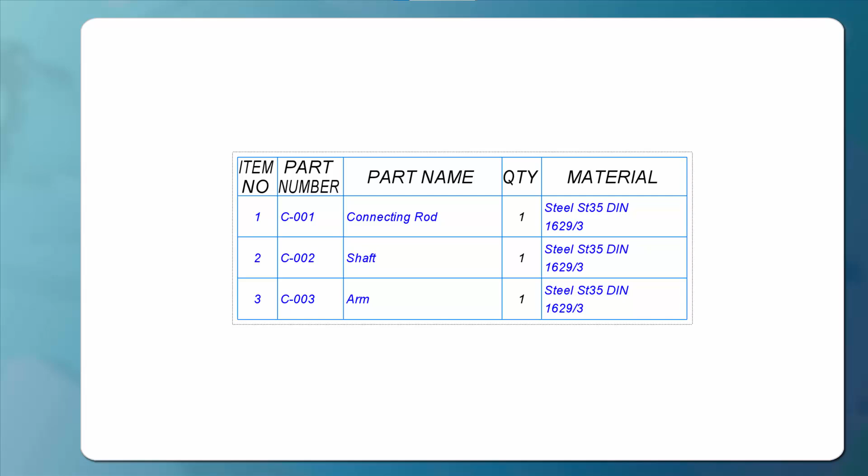In this video, we'll finish creating the report and test how it works. We don't need to number report tables. Turn on the Associative Report option because you are creating the report linked to the assembly. Data in the form of links is enabled because the bill of materials data needs to be linked to assembly parameters. Leave the following settings as default. They only make sense if you create multiple tables.

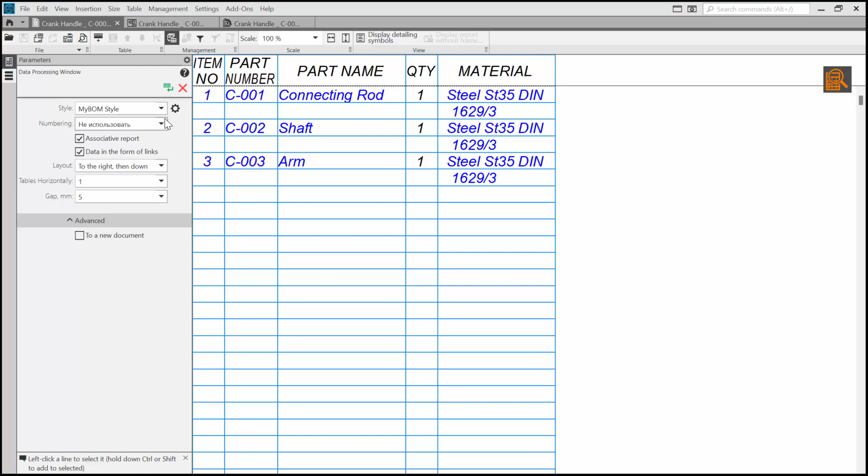The Data Processing Window option allows you to review the table in a special window before placing it in the document. Leave this option turned on. Do not turn on to a new document yet. You will insert the bill of materials into our drawing we've already created. Click Create. The Data Processing window will open. You can edit some settings here, or correct the report style if needed. Let's change the alignment for the material column to the left.

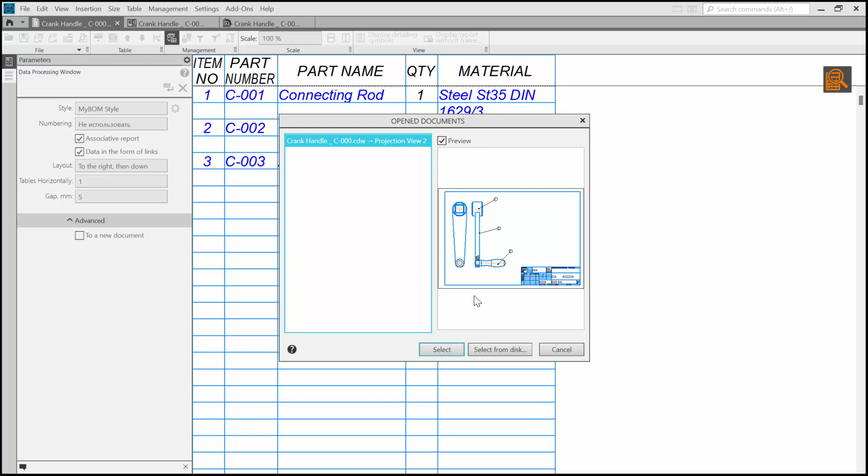Click Create. The Opened Documents dialog appears. The system prompts you to place the bill of materials in one of the open documents. If no documents are open, the system will request that you select a document on your computer. Select the crank handle drawing and click Select. Place the table on the drawing sheet. Finish the command. Go to the drawing. Let's adjust the views and the table a little.

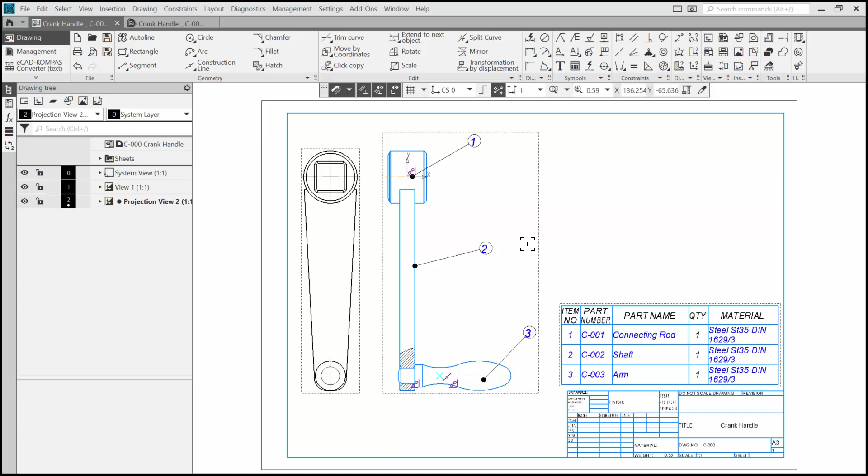Let's check how the connection between the documents works. Go to the Assembly and add one more arm. Place it anywhere, it doesn't matter because we're adding the arm only for the experiment. Save the model and return to the drawing. Rebuild it. You can see that the second arm has appeared in the views and in the table. However, it isn't grouped with the first arm. This happened because the item number for the second arm hadn't been defined.

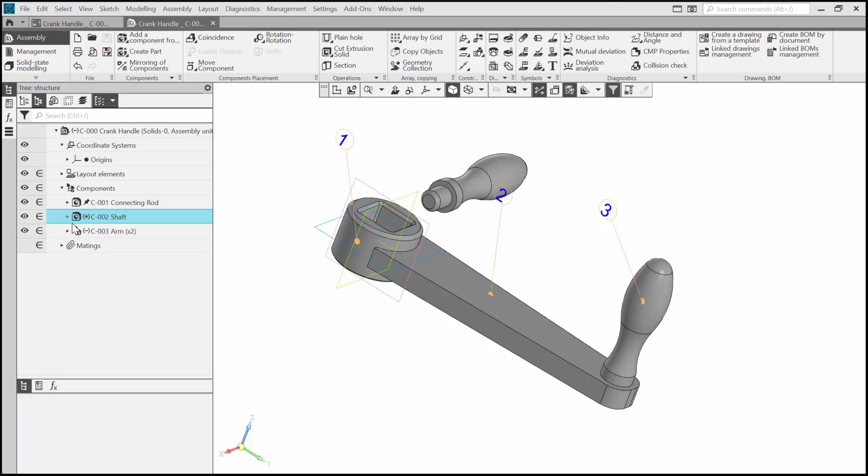Let's fix that. Go back to the model. If we review the new arm's properties, we'll see that the position property field is empty. You can assign the position value right here. However, if you're working with a large assembly containing numerous parts, manually changing properties for each part one by one would be very time-consuming. We will use the Product BOM panel.

First, we need to display it. Go to the Settings menu, Toolbars, Product BOM. The Product BOM table will appear. Later, you can return to this panel using this button. Click Expand. You can see the composition of our assembly here and the properties of all the components. For more detailed information about the Product BOM toolbar, refer to the KOMPAS-3D help system or our upcoming lessons.

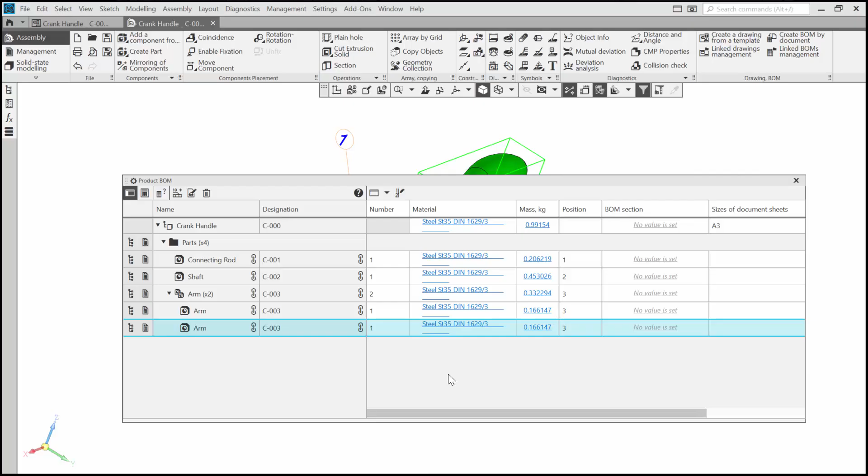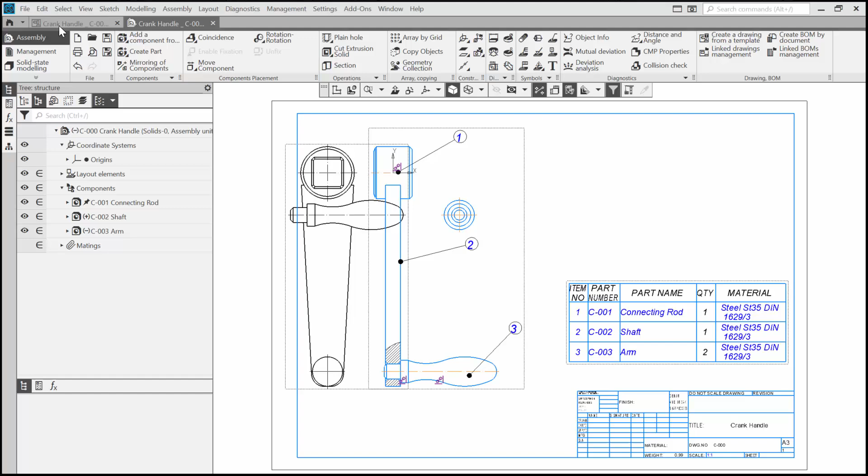Now, start this command. It allows you to assign item numbers to components. The second arm has received its number. Save the assembly. Rebuild the drawing. Now the arms are grouped. Let me delete the redundant arm. The data in the table has been changed automatically. The report data are linked to the assembly parameters.

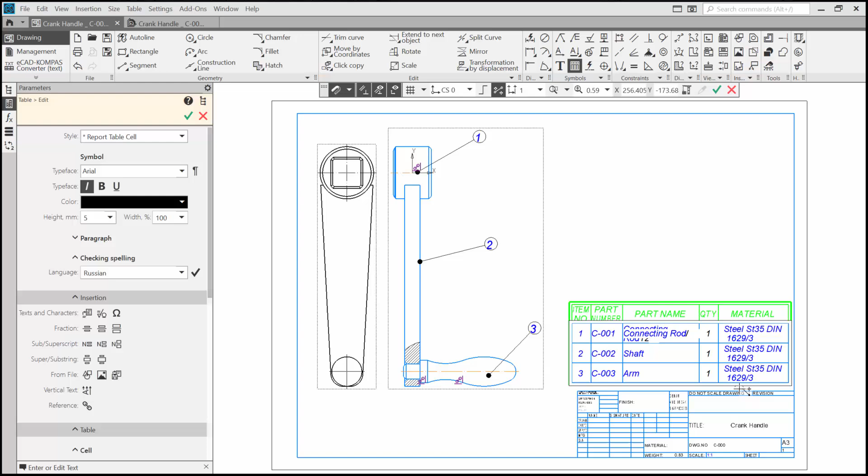If you try to edit them right in the table, the links will break, and the report table will not update when the assembly changes. Note how the text color has changed. Text links in KOMPAS are blue. Once the links are broken, you cannot relink the data. You will have to create the report again. Use Ctrl-Z to undo the last commands. You can add additional text to the report table cells. Parameter links will be preserved. It's recommended to edit the bill of materials last. Double-click on the report's frame if you want to edit the report.

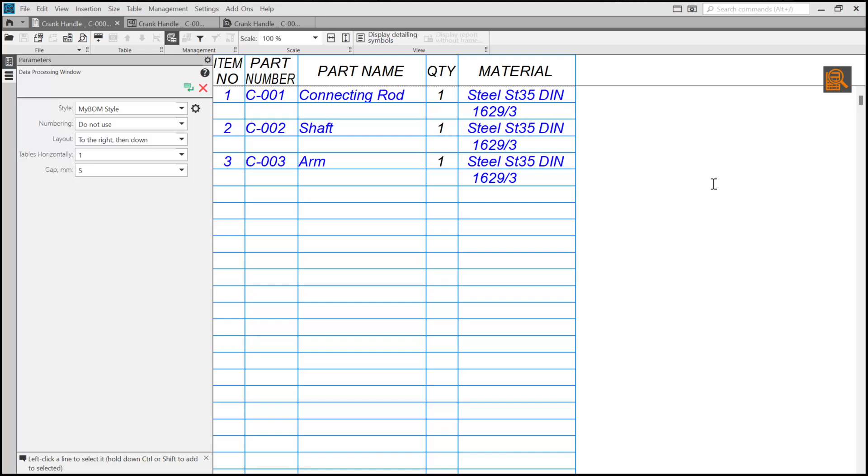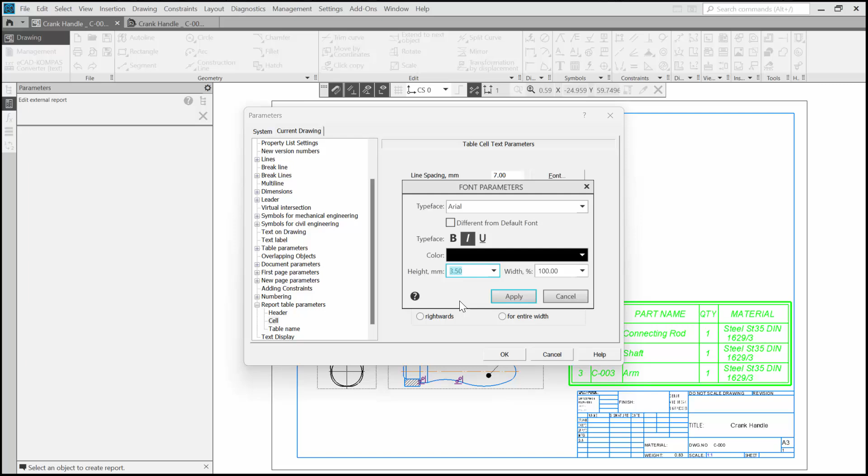If you go to Settings, Parameters, Current Drawing, Report Table Parameters, you will be able to adjust parameters such as the font, or the indentation. The drawing of the crank handle is ready now. Don't forget to save your work.

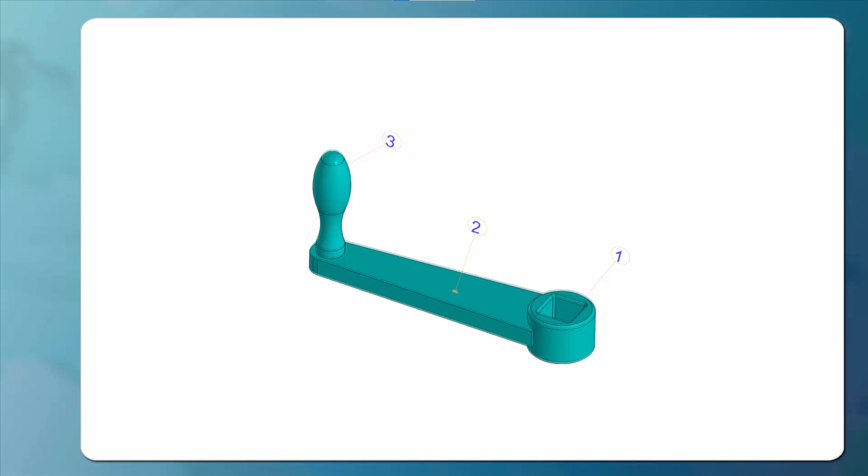In this lesson, we've created the crank handle assembly. We added the balloons to the assembly and generated the drawing, created a custom report style, and inserted the bill of materials into the crank handle drawing.